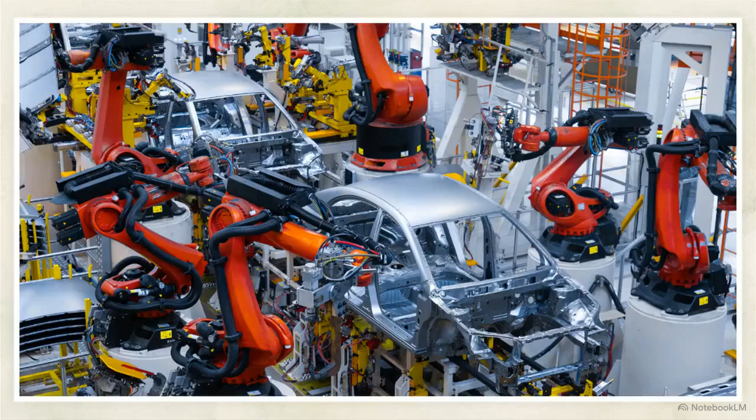For decades, robots suggested a specific image: massive, rigid machines bolted to a factory floor. These heavy lifters manage the brute force work of manufacturing, stepping in to handle intense mechanical cutting, grinding, gluing, and sealing. That static definition is no longer accurate.

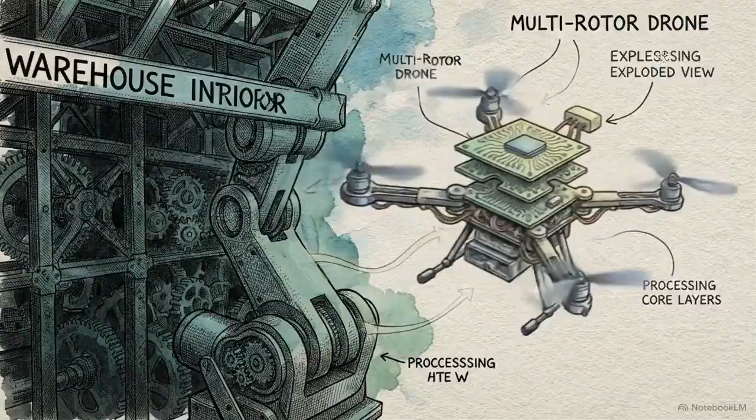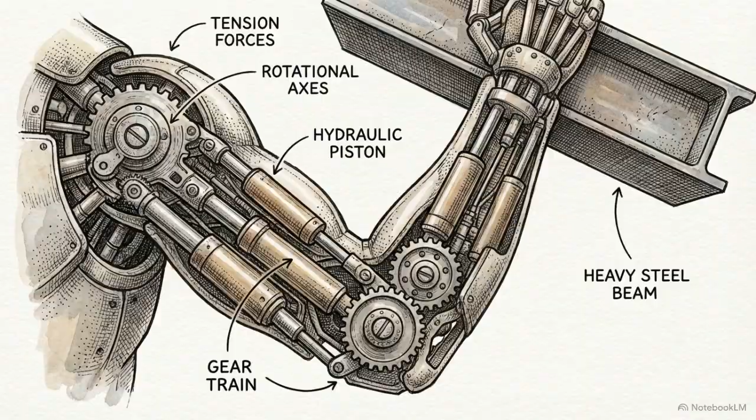Robotics has escaped the warehouse, evolving into a massive variety of shapes and sizes, with the mobility to navigate the open world. This initial wave of integration focused on replacing human muscle. Engineers designed these machines to take over base-level physical tasks that are highly repetitive or dangerous for a person to perform. You can see this shift in agriculture.

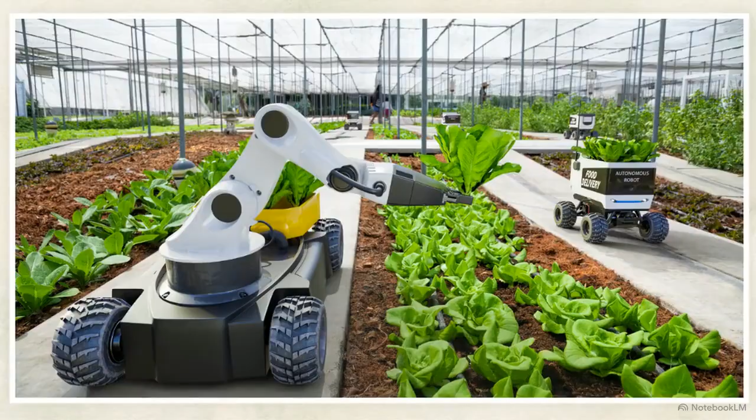Out in the open fields, autonomous rovers handle repetitive physical labor: seeding, weeding, and picking crops with tight precision.

For a business, the math is straightforward. A robotic workforce doesn't require ambient heating or overhead lighting. There are no pensions to pay out, and they never take sick leave.

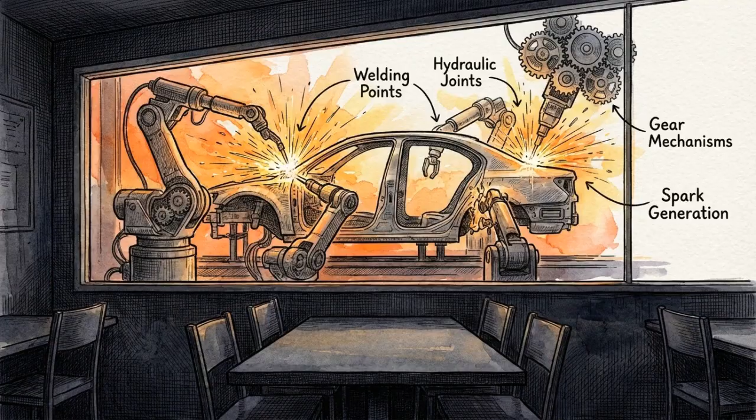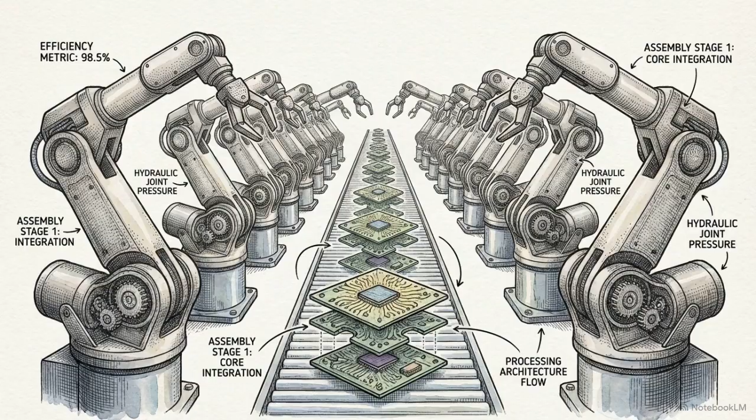Modern robotics has evolved past simple mechanical muscle, now utilizing real-time data processing to interpret and navigate its surroundings. The transport sector is a primary testing ground. Software now takes the wheel in fully autonomous commuter trains and complex airplane autopilot systems.

To pull this off, these vehicles rely on a dense network of internal and external sensors. They are constantly pulling in millions of data points about their surroundings and processing that information in milliseconds.

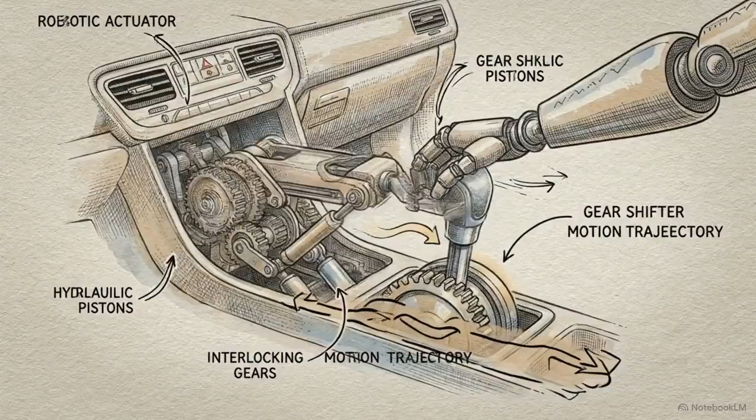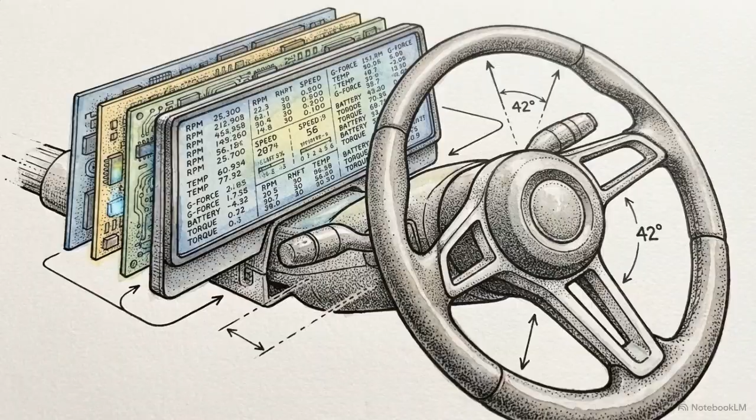The software translates environmental data into physical actions. It calculates exactly when to apply the brakes, shift gears, or adjust the steering, executing every single maneuver with absolute mathematical precision. In these scenarios, the primary objective is safety.

By removing human fatigue and distraction from the driver's seat, engineers aim to drastically reduce accidents and improve public transit reliability. That demand for absolute precision scales down to the microscopic level in modern medicine.

Hospitals actively deploy robotic systems to assist surgeons during complex procedures. They also use automated setups to draw exact blood samples and run deeply detailed monitoring of patient vital signs.

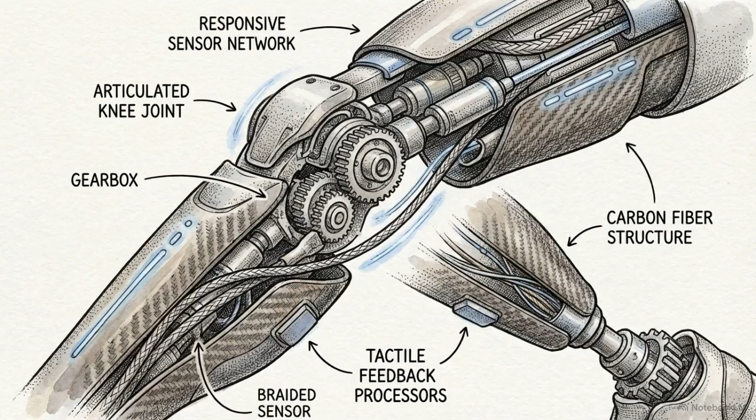Researchers are even developing microbots, tiny navigable machines designed to travel directly through the human bloodstream to deliver targeted therapies to specific cells. On a larger scale, this exact same underlying technology powers responsive prosthetic limbs and operates the automated sanitation units that disinfect operating theaters.

In a clinical setting, automation sheds its reputation as a simple corporate cost-cutting tool. Here, robotic integration is actively streamlining hospital workflows and directly contributing to saving human lives.

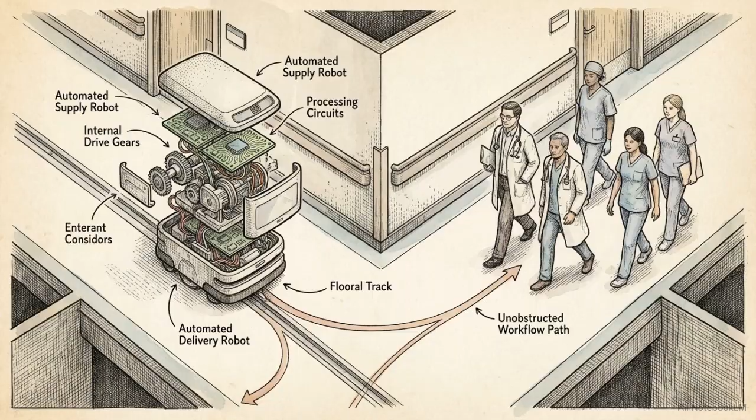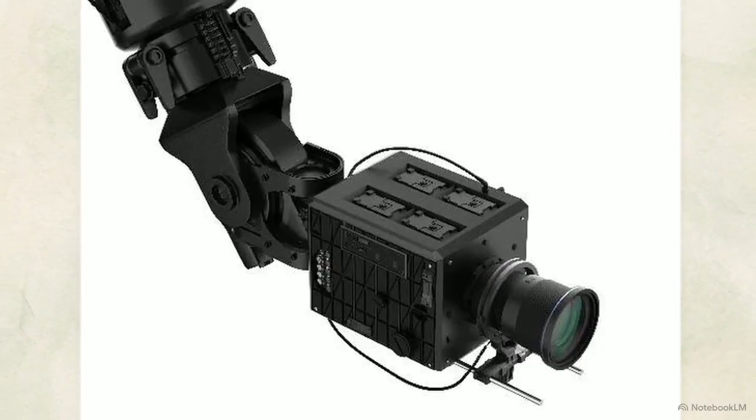It is one thing to operate in the sterile, controlled environment of a hospital or factory. It is entirely different to release a machine into the unpredictable chaos of a film set, where robotic camera arms must track moving actors. Or consider an even more unscripted environment, your own living room.

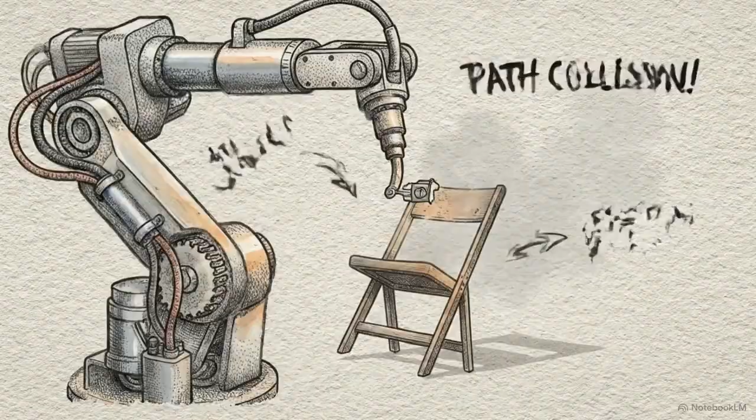Domestic robots face the complex task of navigating around our ever-changing clutter. Because homes are unpredictable, consumer robots are restricted to highly specific jobs, like vacuuming the floor or acting as localized smart hubs. A machine that can weld a car chassis flawlessly will completely freeze if a chair is moved 2 inches to the left. These messy, human-centric spaces reveal exactly where current programming hits a wall.

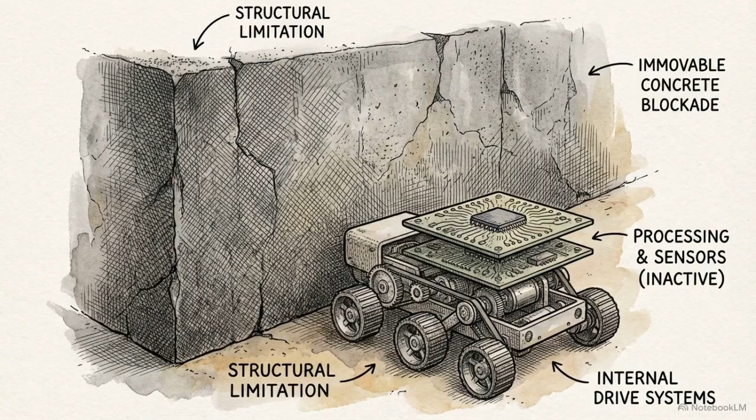And there are structural walls as well. Despite the long-term savings, engineering, purchasing, and installing a fully robotic system requires an incredibly expensive initial investment.

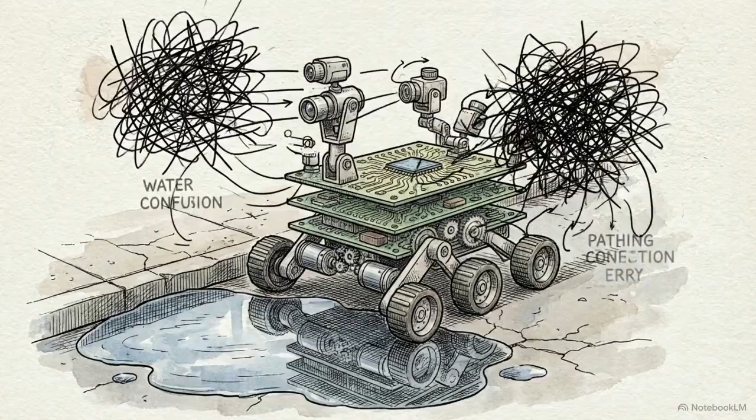A robot operates strictly within the boundaries of its code. When confronted with an unexpected, completely novel situation, it lacks the intuitive reasoning required to adapt on the fly. That gap is why true automation still requires heavy human oversight. We provide the adaptability and context that the algorithms cannot generate on their own.

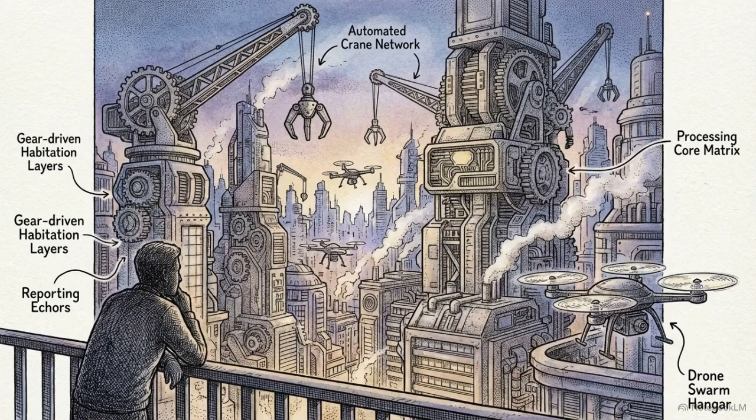We are actively trading stable manual labor and digital security for a peak in operational efficiency. This shift leaves our economic and social structures to catch up with the world these machines are already building.